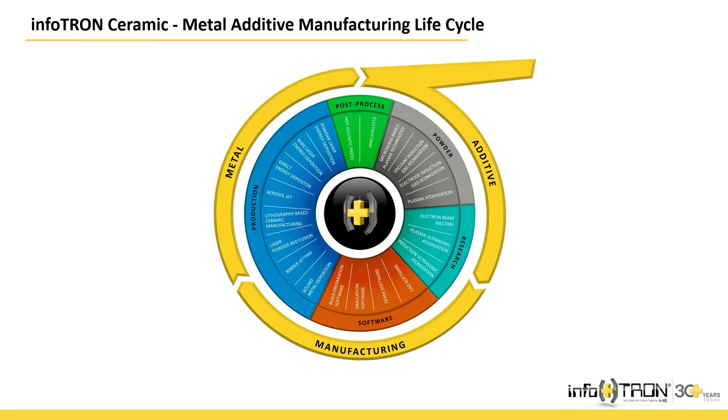At infoTRON, we have never seen additive manufacturing as just a manufacturing system. We see it as an integral part of the wider manufacturing ecosystem alongside other manufacturing methods. For this reason, we manage our technologies in several key areas: production systems, software solutions, powders, powder development, parameter development, and post-processing.

Within this perspective, our goal is to be a company that provides solutions across all stages of additive manufacturing while collaborating with strong and leading technology manufacturers. With this vision, we collaborate with leading manufacturers across a range of technologies, including software, automation, EBM, DED, aerosol jet, LPBF, HIP, electroforming, and many more.

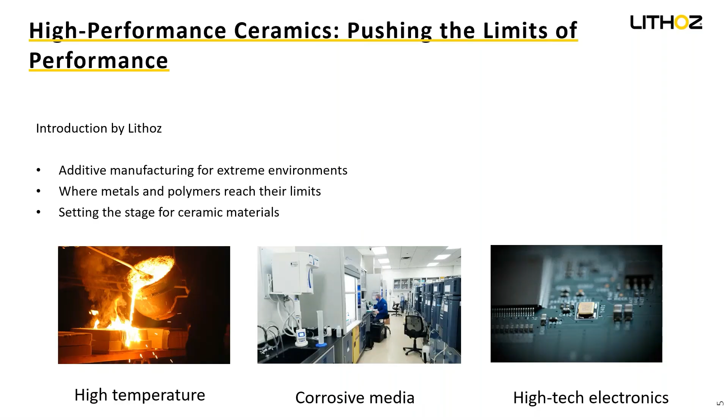This slide shows why ceramics are so valuable in high-performance applications. Ceramics offer properties that metals and polymers cannot achieve. They provide excellent electrical insulation, strong resistance against chemical corrosion, and very high mechanical stability.

Materials like zirconia offer outstanding bending strength, and others provide transparency or very high thermal conductivity, such as aluminum nitride. Ceramics also handle high temperatures, thermal shock, wear, and abrasion extremely well. These are the reasons why many industries rely on ceramics when other materials fail.

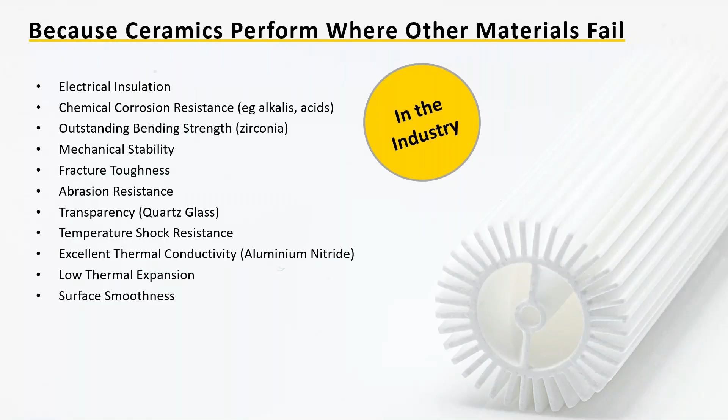In medical and dental applications, ceramics offer a different set of advantages. They are biocompatible, and some materials are even bioresorbable. Others, like silicon nitride, support osseointegration and have anti-infective properties.

Ceramics also provide excellent electrical insulation, translucency in the case of alumina, and a very clean surface quality, which is important for implants and instruments. These properties make ceramics a strong choice in areas where safety, cleanliness, and long-term stability are essential. This is why ceramics play an important role in many modern medical and dental devices.

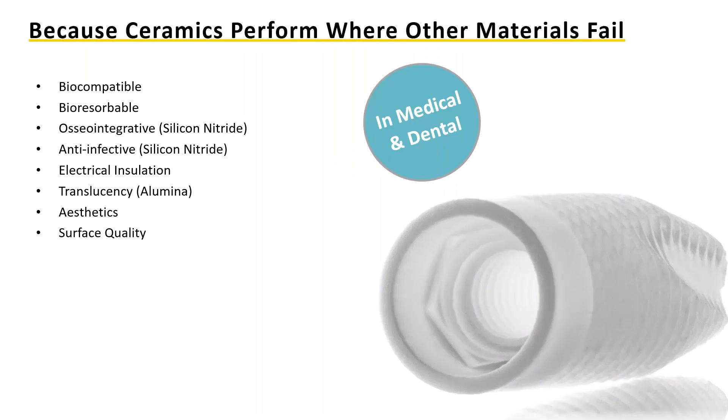Now that we have seen where ceramics are needed, let's look at why they are so important, specifically in additive manufacturing.

Ceramics in additive manufacturing are not here to replace metals or polymers. They are a complementary material class that fills the gaps when other materials reach their limits. Ceramics are engineered for extreme conditions: high temperatures, strong wear, aggressive chemicals, and demanding electronics environments.

On the right, you see a comparison of typical properties. Polymers and metals perform well in their own areas, but ceramics stand out when it comes to temperature resistance, electrical insulation, chemical stability, and wear resistance. These are exactly the properties many additive manufacturing users need today, and this is where ceramic additive manufacturing brings real value.

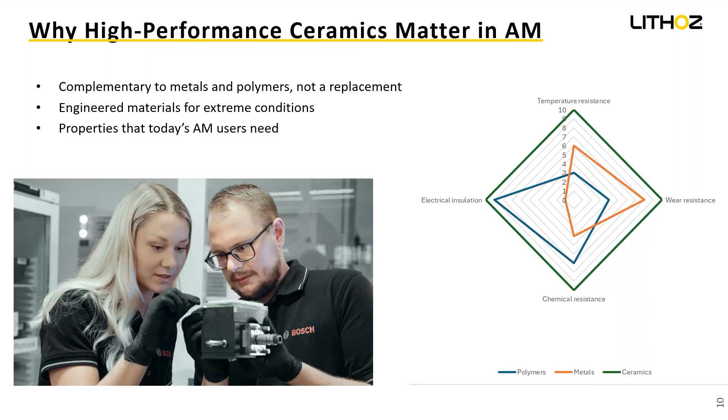Now, independent of the exact ceramic material, the design advantages of additive manufacturing are similar to what you already know from metals and polymers, but in a much harsher environment. Conventional ceramic manufacturing is great for simple shapes that can be pressed or machined, but internal channels, complex 3D flow paths, porous structures with defined geometry, or very fine details are extremely difficult or expensive to realize.

With ceramic additive manufacturing, especially lithography-based ceramic manufacturing, we can integrate these features directly into the part: internal cooling or fluid channels, lattice structures, and miniaturized features. In many cases, we can combine several functions, for example, fluid handling, thermal management, and electrical insulation in one single component, reducing assemblies and interfaces.

Later in the materials and applications talks, you'll see concrete examples, filters, reactors, medical devices, and more that benefit from this combination of design freedom and ceramic performance.

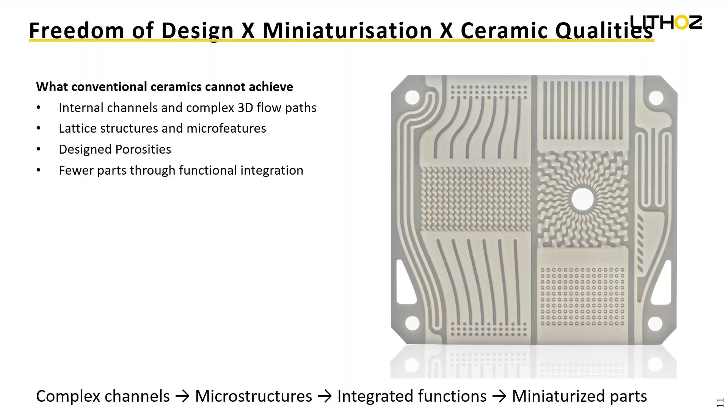This example shows how ceramic additive manufacturing can combine several functional features into a single tool. This part you see here is an arthroscopic knee shaver, and it actually consists of two ceramic components that work together.

What is important to notice is the scale. The reference here is only 10 millimeters. 10 millimeters is extremely small, about the width of your fingernail. So achieving this level of detail is very challenging with conventional manufacturing.

As the features appear on the slide, you can see the different channels: channels for rinsing, a channel for the light source, a channel for drainage, and the rotating cutting blades in the front section. All of these complex internal structures are created in one production step with no assembly work needed. This is a good example of how ceramic additive manufacturing can deliver compact, functional designs at very small scale.

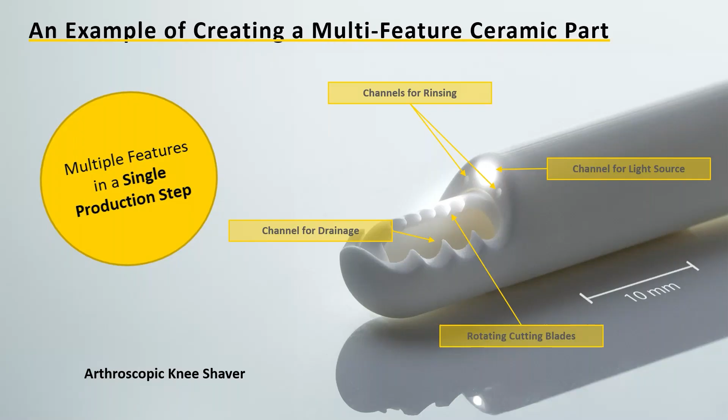Next, I'd like to introduce an important topic in ceramic 3D printing, the thermal processing challenge, and why it plays such a critical role in achieving high-quality ceramic parts.

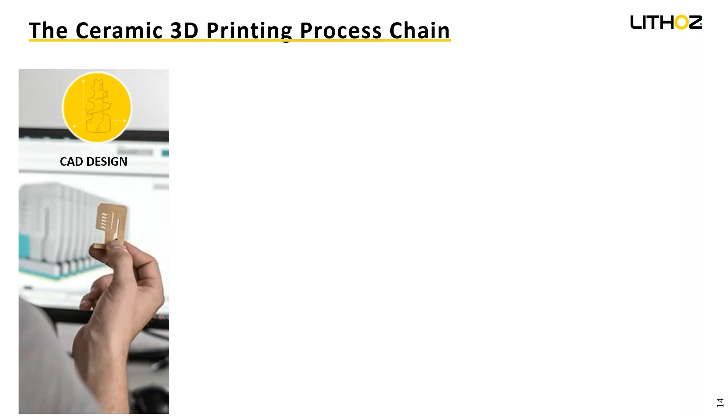Ceramics are attractive for many applications, but they are not as easy to process as metals or polymers. Metals can often be melted and re-solidified, and polymers can be melted or cured directly. Ceramics cannot simply be melted. They must first be shaped and then densified through sintering.

In ceramic additive manufacturing, our first step is always the same: we print the so-called green body. This green body is made from ceramic powder mixed with an organic binder. At this stage, it has the right shape, but it is not yet a ceramic part. Everything that follows depends on how well this green body is printed.

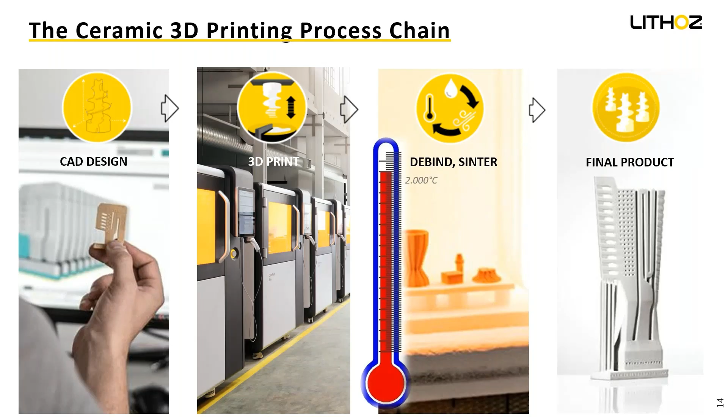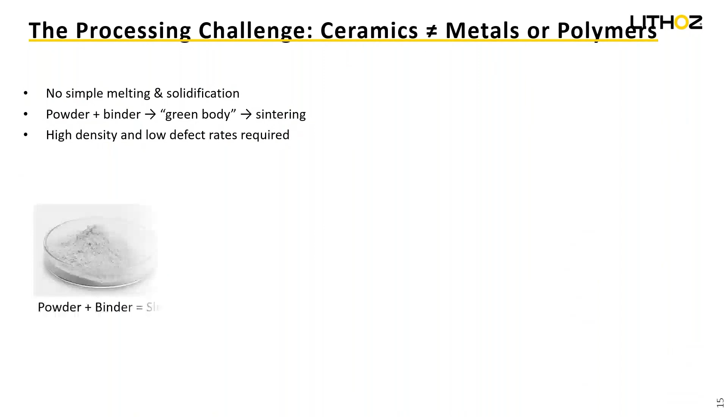Here is why the green body step is so critical. Since ceramics cannot be melted, we must work with a slurry made of powder and binder. This slurry is printed, and then we have the green body, which is still soft and full of binder. Only later, during the debinding and sintering, do we achieve the final ceramic.

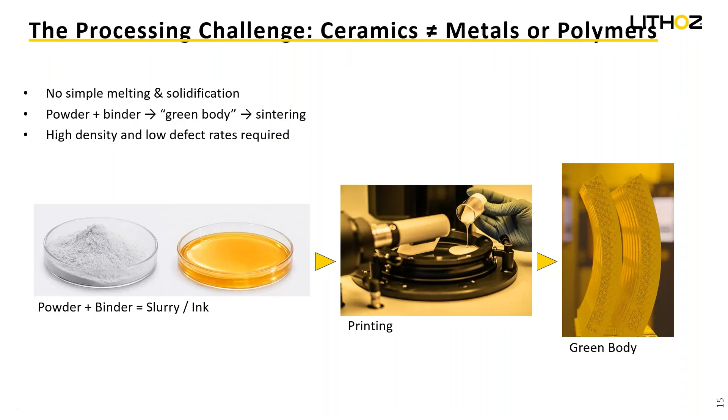If the green body is not printed correctly, for example if the print is not uniform or the features are not clean, it becomes very difficult to reach high density and low defect rates after sintering. So the entire success of ceramic additive manufacturing starts with getting the first step right.

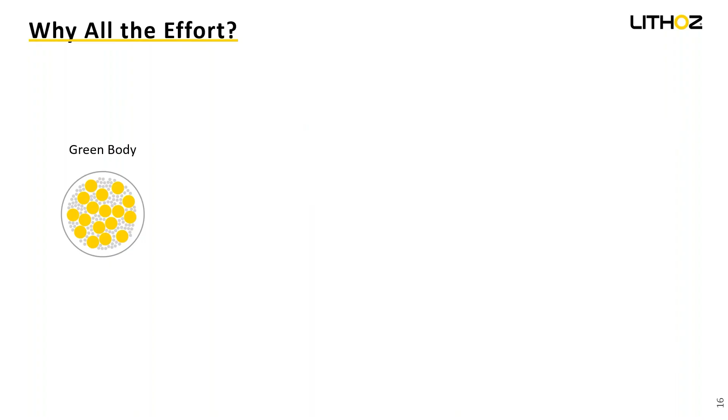Once we have printed the green body, the real work begins. In the green state, the part is made of two components. The yellow dots represent the ceramic particles, and the gray areas represent the organic binder that holds everything together. At this stage, the part is still fragile and not yet a ceramic.

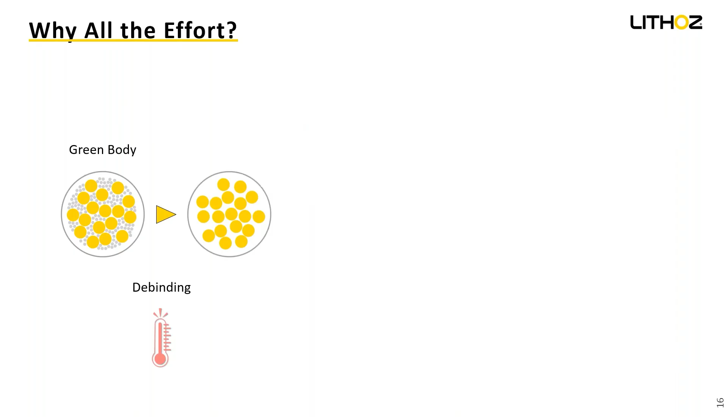During thermal post-processing, we first remove the binder, and then we sinter the ceramic particles together. As the temperature increases, the ceramic particles bond and the structure becomes dense. This is what transforms the printed shape into a true high-performance ceramic part.

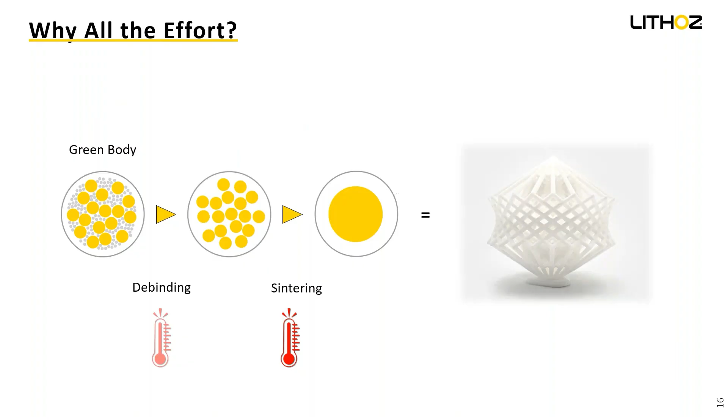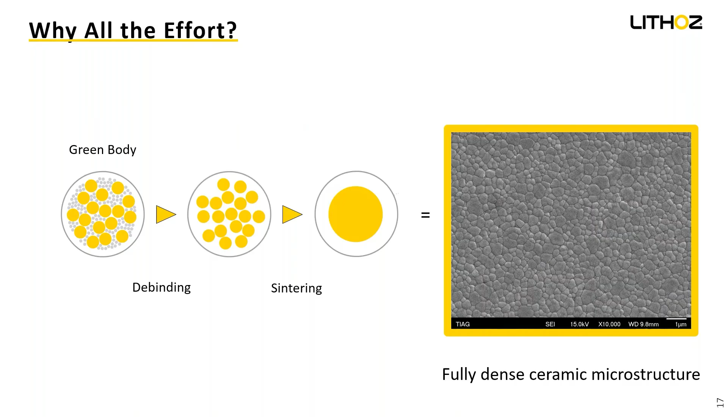The second image shows the result we aim for, a fully dense microstructure with no pores and no defects. Achieving this density is essential because it gives the final component its strength, reliability, and high-performance material properties.

Now let's look at what makes our lithography-based ceramic manufacturing unique and why this technology achieves such high precision and quality. When we talk about lithography-based ceramic manufacturing, the main point is density.

Ceramic parts only work if they are fully dense. Even tiny defects can make them fail. Lithography-based ceramic manufacturing achieves this because we work with a liquid, photocurable ceramic suspension. This allows the ceramic powder to be shaped with very high precision before it is sintered.

A major advantage of LCM is material flexibility. We are not powder manufacturers, which means we can turn any commercially available ceramic powder into a printable slurry. This gives customers full freedom to choose the ceramic that fits their application.

With the DLP digital light processing exposer, we can create ultra-fine details and very smooth surfaces, and the final sintered parts reach true industrial performance. This combination of precision, density, and material freedom is what makes LCM outstanding.

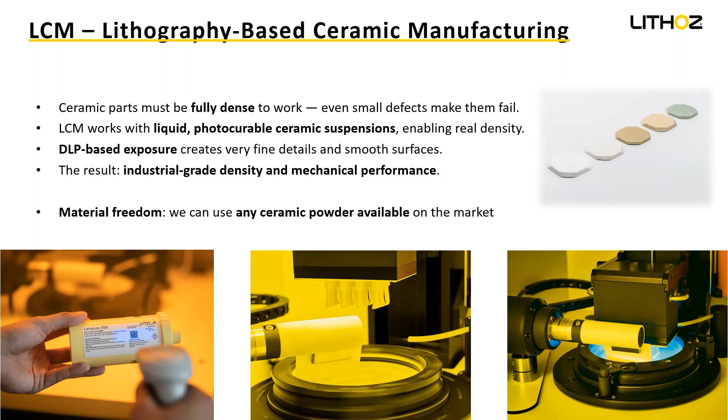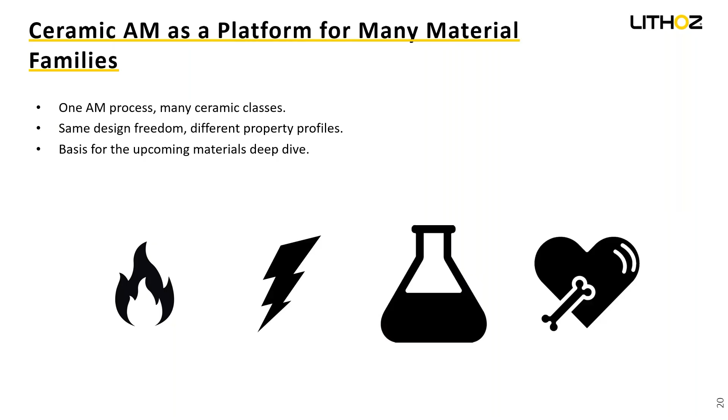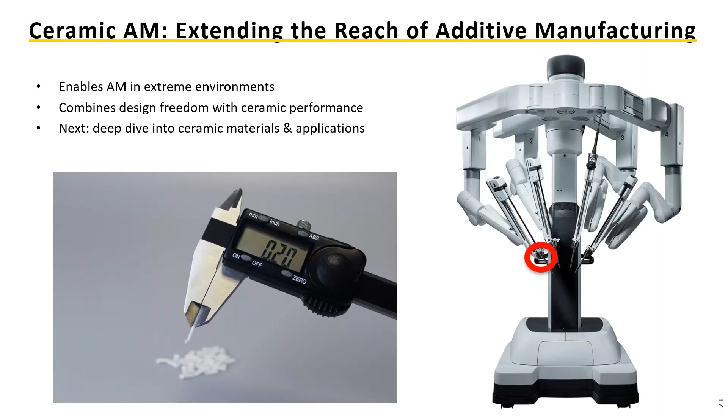So now, as Gerardo mentioned, I will go into the details about our materials a bit. One of our main advantages is that our technology is incredibly versatile. We can manufacture nearly all ceramics into a 3D printed green body. Some of them are more challenging than others, but in the end, we manage.

As you can see, our ceramic material portfolio is pretty large. We can process silicon nitride, aluminum nitride, then classic aluminum oxide and zirconium oxide, and of course the mixture of both represented in toughened alumina and toughened zirconia. We can process cordierite, and of course our medical materials, calcium phosphate with tri-calcium phosphate and hydroxyapatite. Then we have the group of silica-based casting cores and lithium disilicate for the silicates, and curiosities like moon dust.

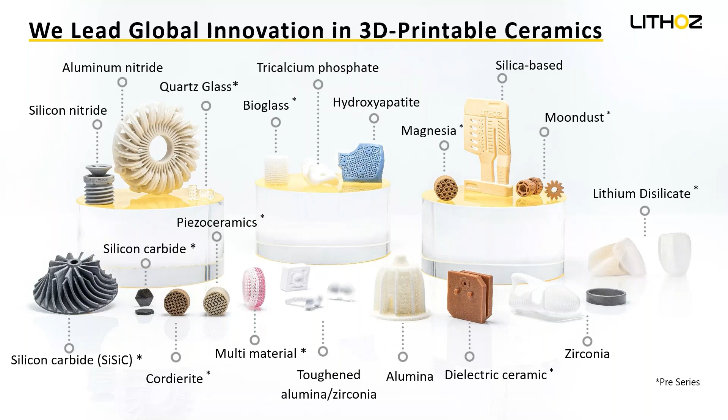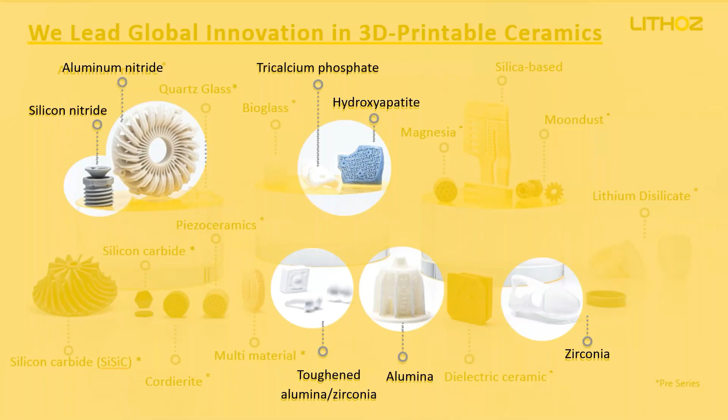The first one I want to show you is aluminum oxide. Aluminum oxide is still one of the most sold and used ceramics in the market. It has many applications, and as in traditional ceramic manufacturing, it is the easiest to manufacture. On the right-hand side, you can see the microstructure we achieve with our technology and a nice demo part showing an application for a nozzle, where ceramics really shine. Alumina in itself has a very broad range of applications, be it technical, medical, or electrical.

As a thread guide, for example, or as medical devices for permanent implants or devices. You can even make dental brackets with translucency or use it as a housing device for medical applications.

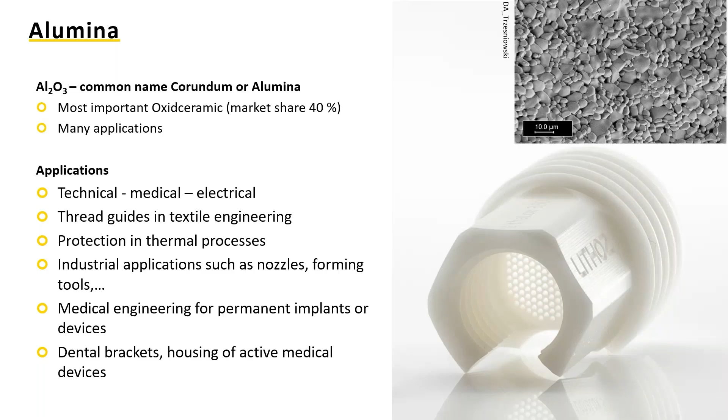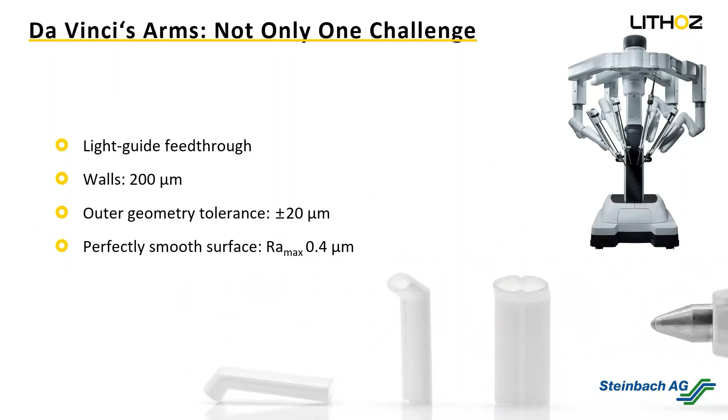An example that you saw before on Gerardo's slide is the Da Vinci arm. I want to show this part in more detail because I personally find it really impressive. The machine was developed and they had an existing problem: they needed a light channel on a material that can stand the high demands for the application. So they 3D manufactured it, and the tolerances were relatively small, as was the geometry overall. You can see the tip of a pen on the right hand side, and this was very challenging, with the precise angles we needed to achieve. It's a very good representation of where LCM really shines, the high precision and high demanding applications.

Another application for aluminum oxide, which is very high end, is the dental bracket. For the dental bracket, translucency is very important. If you think ceramic, translucency is not the first thing you think of, but the finish is very nice, and the ceramic properties you can achieve are outstanding. The aesthetics are beautiful, and we have advantages like being able to realize designs which you could not with injection molding. For example, you can print sharp 90 degree angles that you could not demold traditionally, and you are now able to manufacture via LCM.

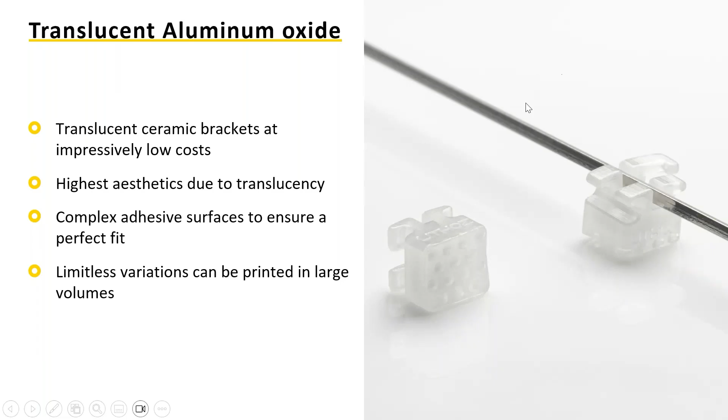Here is another close-up of what you can achieve with our technology. This is one of my favorite pictures that exists from aluminum oxide, since it really shows you can hide nothing at this resolution, and it really shows the translucency that we can achieve.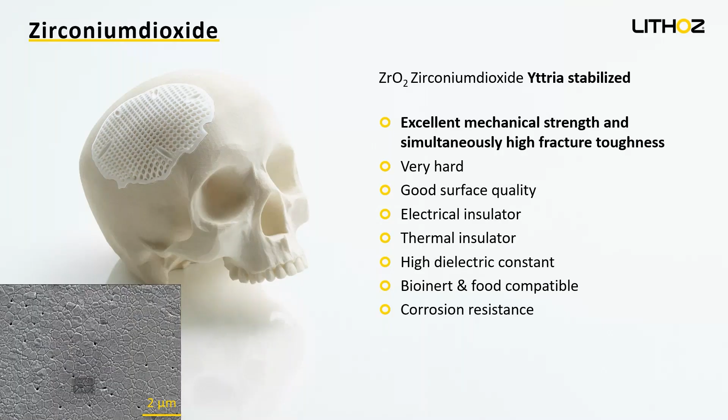As an example of the implants that we were able to manufacture, or our customers were able to manufacture, with zirconia, here is the subperiosteal jaw implant that was a great success, healing in very well, and the soft tissue formed perfectly over the implant. There are articles and interviews with our CEO online available if you are interested. As I showed before with the skull implant, a great example for the advantage of ceramic in implants is that they are, for example, not heat conductive, and they are usually very well accepted by the body.

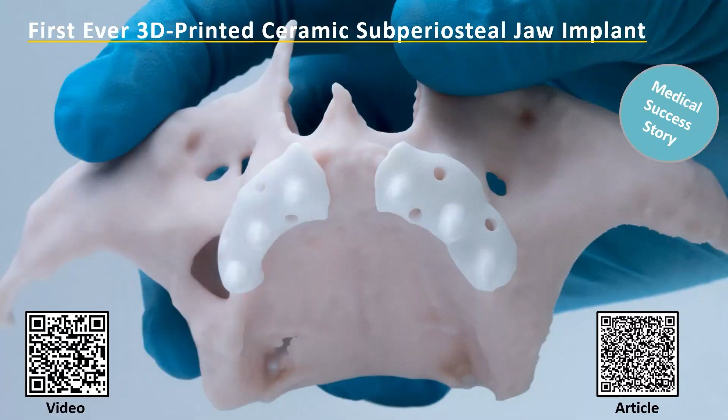Another implant example for zirconia, and a very good example of one of the main advantages of LCM, are the dental implants. Here the most important thing is precision and reliability. You can print these implants from zirconia, ATZ, and silicon nitride, but the most important thing in all of them is you have high design freedom, and there is no post-machining necessary. You can also produce a very high quantity with a tailored surface. The advantage of LCM is that you build all of these parts on the building platform at once. You light every layer, every part at the same time, so it doesn't matter if you produce one part or fifty.

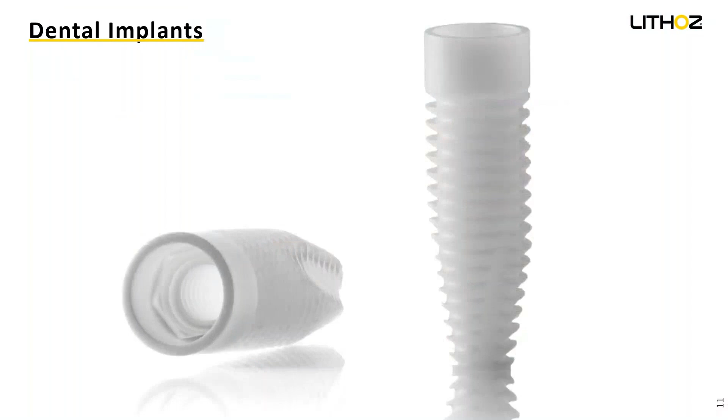Here is a close-up, because the last picture does not give the screw nut justice. You are able to print and generate inner working threads, which is basically impossible to manufacture with other technologies.

Now we move over to the calcium phosphates. These are our implant materials that are resorbable and biocompatible and osteoconductive and inductive. As you can see on the right-hand side, they are already in use by customers for certain applications in implants, and I'm always impressed by this figure, by seeing what our technology can contribute to implants.

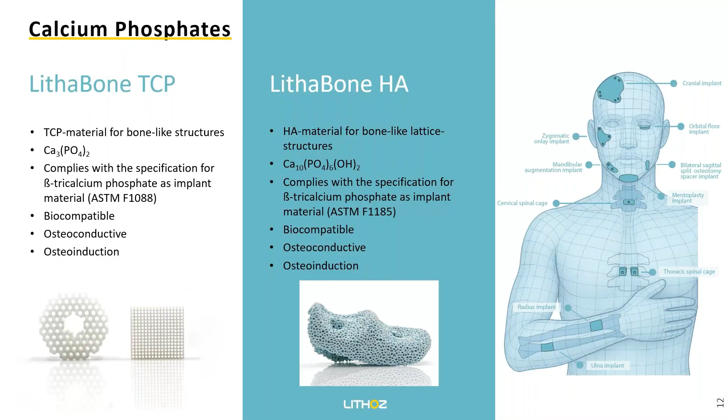For example, I have two examples here. This is hydroxyapatite. One is the skull implant, where being able to generate patient-specific designs with a porosity that you as a customer can choose is a huge advantage. The surgery is faster because the fit is already better, and you don't need to remove parts from other parts of the body to replace existing bone, which makes it much better.

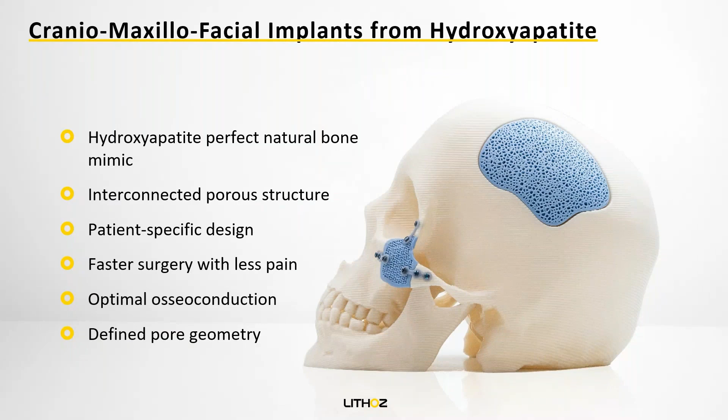Another one would be the critical bone defect in the arm bone. What's important here is that you can generate the correct angle of the implant to match the defect in the bone. This is a huge advantage, and it also delivers excellent osteoconduction.

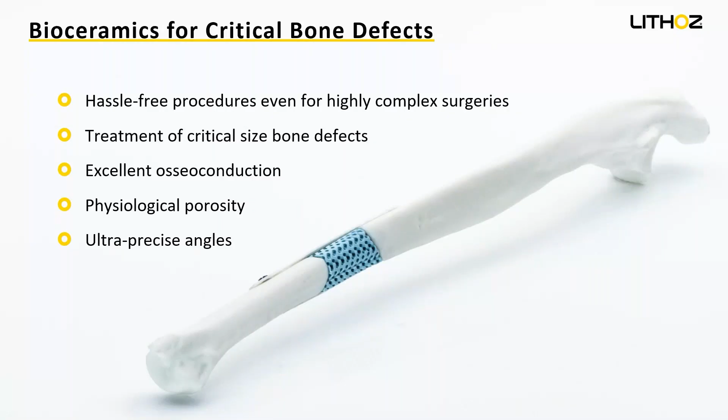The next one I want to show is LithaCon ATZ 980. This is an ATZ, an alumina toughened zirconia with a ratio of 80:20 between zirconium oxide and aluminum oxide. This material is great for medical implants, but also for technical applications. The processability is very good, and the mechanical properties, if processed correctly, are outstanding.

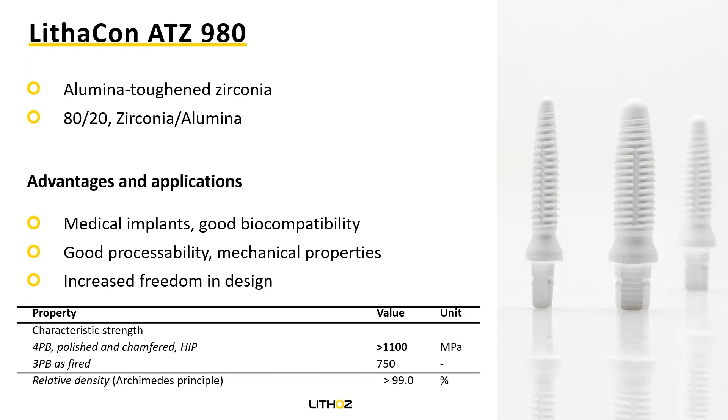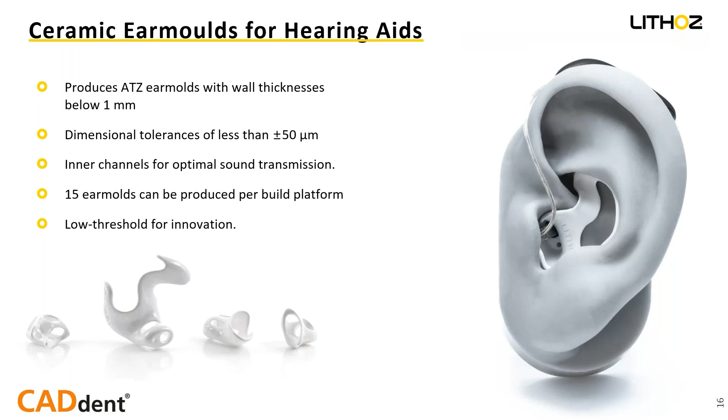An example for ATZ would be the ceramic ear molds for hearing aids. Here you can see a part that is under 1 millimeter in wall thickness overall, but the dimensional tolerances are less than 50 micrometers, which for a free form is very impressive. The inner channels are optimal for sound transmission, and you can produce 15 ear molds per building platform on an S65.

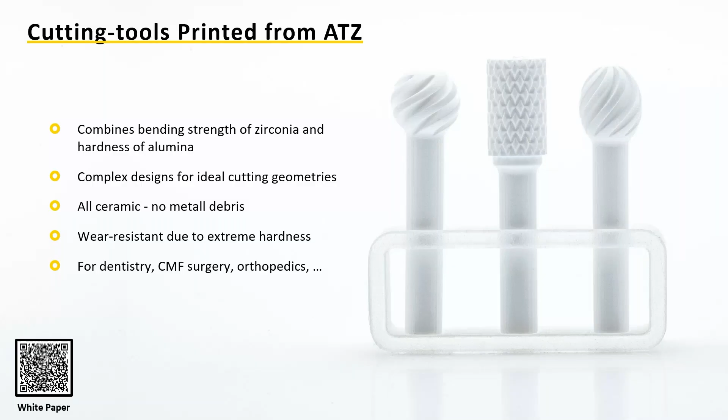It goes without saying that the quality of the ceramic is for us the most important part of developing slurries, since if you want to reach good thermal conductivity in a ceramic, the ceramic needs to be perfect.

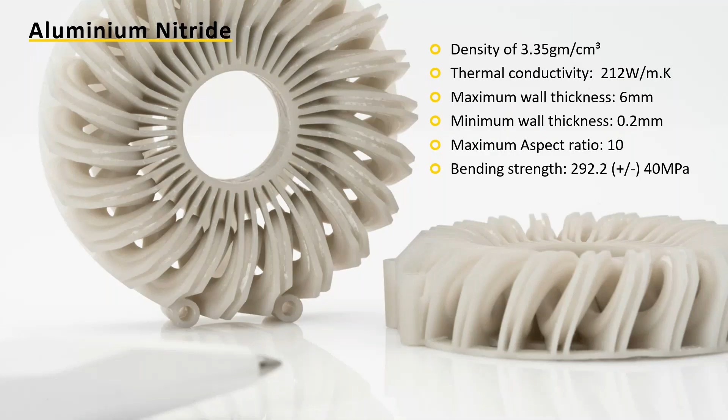The last material that I have for you today is silicon nitride. It's also a non-oxide ceramic. It's a mixture of alpha and beta silicon nitride, and our silicon nitride, as most silicon nitrides, is SiAlON, which means it uses sintering aids of aluminum oxide and yttria oxide. Silicon nitride has a few very outstanding properties, even in the ceramic world. For example, excellent thermoshock resistance, while also having low thermal expansion. You can work this material at high temperatures as you could at room temperature.

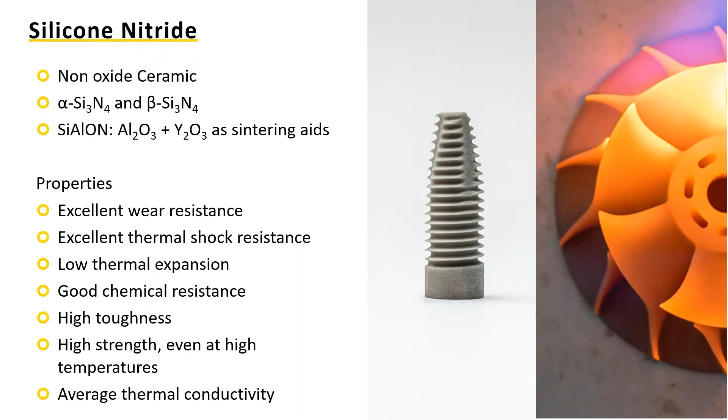I chose silicon nitride to show how we compare ourselves. If we develop a material, we aim to achieve the same properties as the powder supplier would get through traditional forming. Here we have, for example, density, hardness, bending strength, and thermal conductivity reached, shown that we are on par with traditional manufacturing.

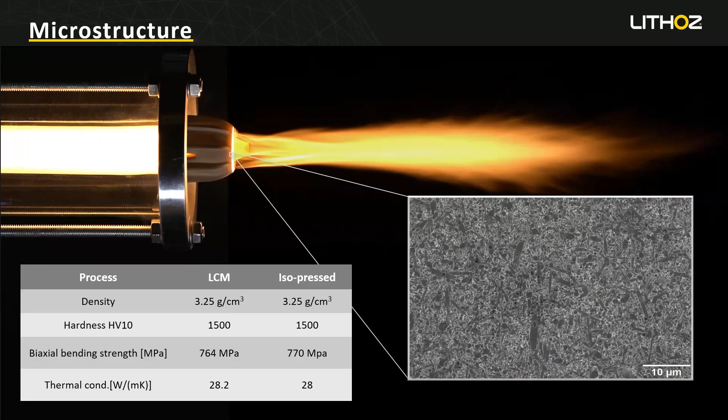On the right hand side, you see the microstructure of silicon nitride. As you can see, there are no defects or anything.

And lastly, an outlook for a possible silicon nitride application would be implants for humans, like skull implants, because with silicon nitride you have the advantage that it is translucent to X-rays, CT scans, and MRIs. And as Gerardo already said, it has very outstanding properties for reducing the risk of infections.